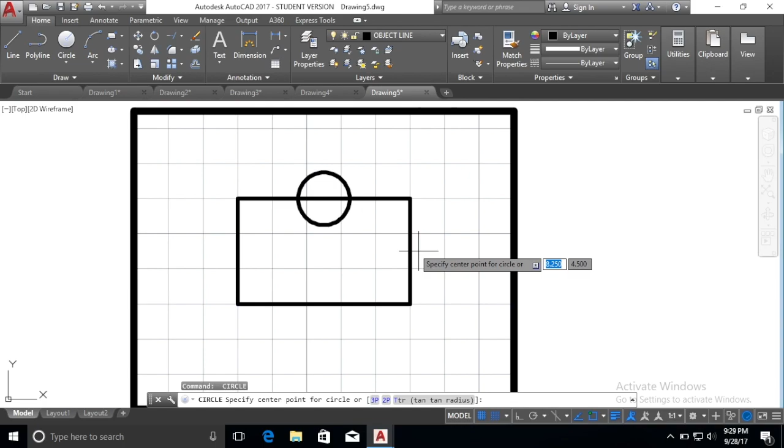I'm using the incremental snap tool to make sure I get it exactly right. Now I'm turning on Object Snap for midpoint so that the center of our circles snap to the midpoint of each side of the rectangle. I'm going to draw my circles so that they are all about the same size, and because I'm using incremental snap, they should be exactly the same size on all 4 edges.

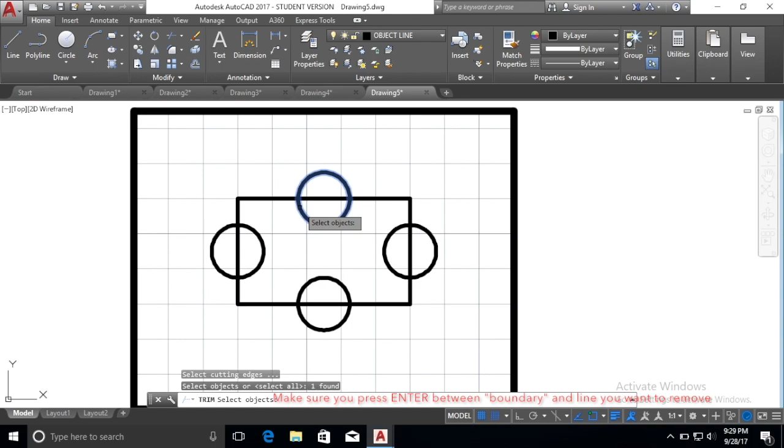Then I'm going to use a new tool, the Trim tool, to trim out the parts I don't want. First, I'm going to select the circle, then I can select which is the line that I actually want to get rid of, the boundary of that line that I want to disappear.

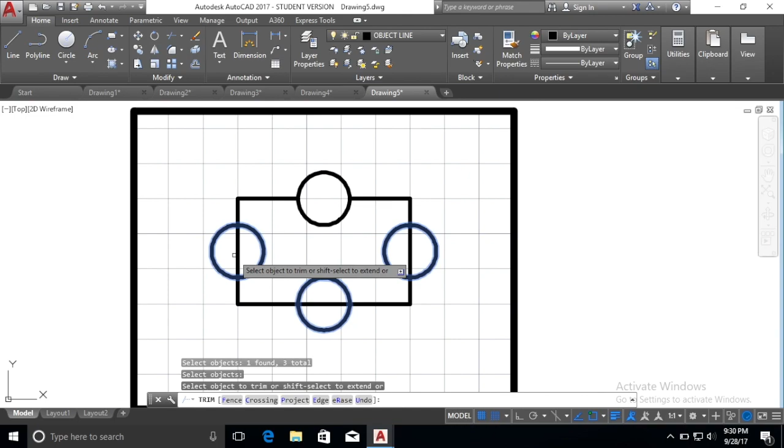You can make this process a little faster by doing all the rest of the circles together. I'm selecting all 3 of these circles, pressing enter, and then selecting the lines inside them to make them disappear. I still need to get rid of the second half of the circles on the outside. So the boundary I need here is the box. I basically don't want my circles to go outside that box. So I'm selecting all edges of my rectangle, pressing enter, and then I can trim away the outside of the circles so that I have this ticket shape.

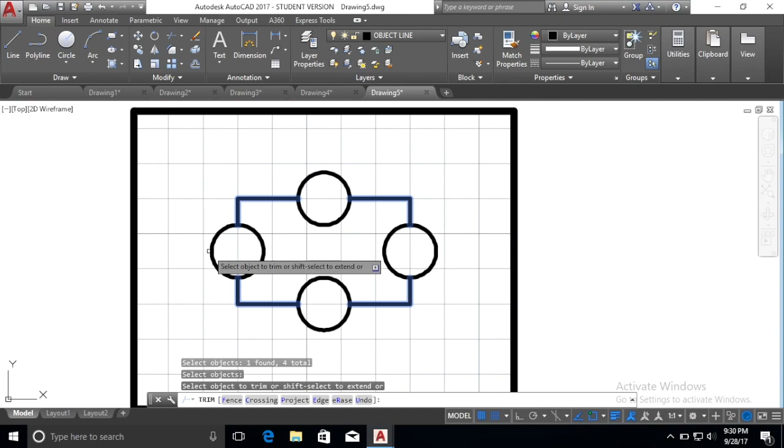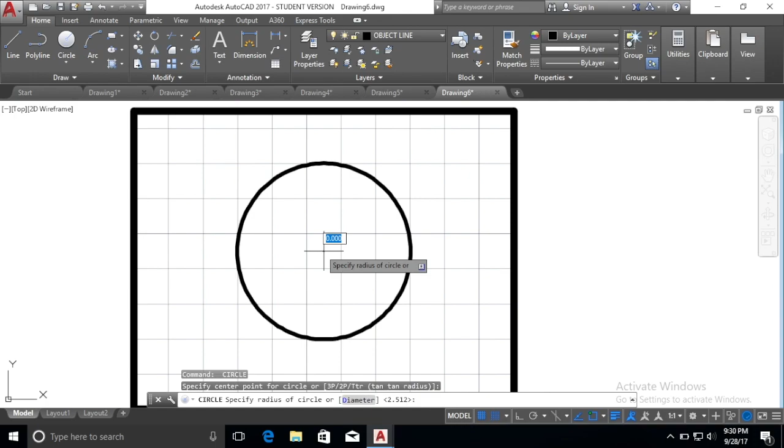Opening up the inch helper template, and I'm going to draw with my incremental snap tool 2 circles that make sure we have the exact same center. If you don't have the center object snap on, you probably want to make sure you have that on so that they are actually centered.

Then I'm going to use the line tool to draw some lines that go through the center of the circle. In between each line tool, what I'm pressing is the space bar to reset and go to another line so that I don't have to keep pressing the line tool each time.

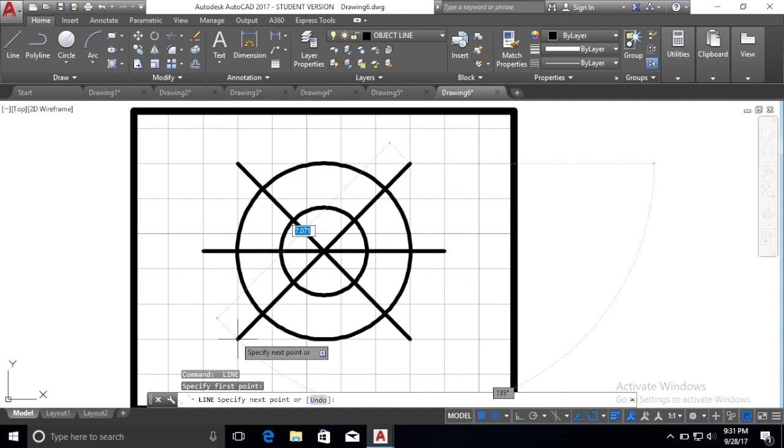After drawing all of these lines through the circle, I'm then going to use that new tool that we just learned about, the trim tool, to trim out the lines that I don't want.

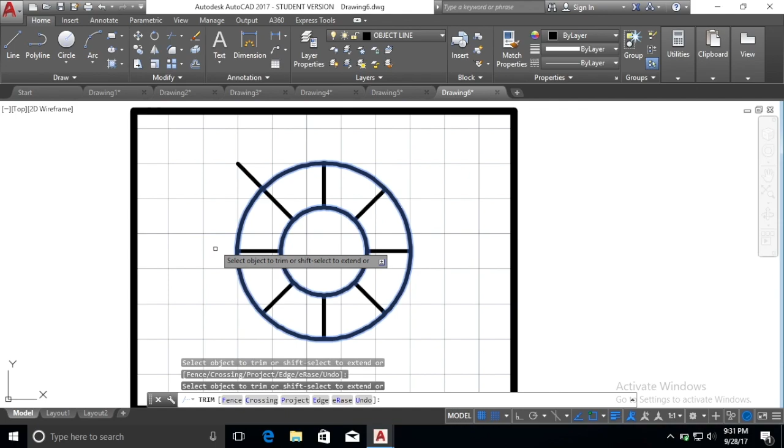First, I need to select the boundaries, so both the inside and outside circle. Press enter, and then I can select all the inside pieces and the outside pieces to get rid of the lines that I don't want. So make sure that you select the boundaries first, press enter, and then you can start to trim away the lines you don't want.

Our next exercise is using the extend command. I'm opening up a new inch helper template, and I'm going to get my line tool, and I'm going to draw 5 lines, turning on incremental snap and ortho so that they're nice and straight.

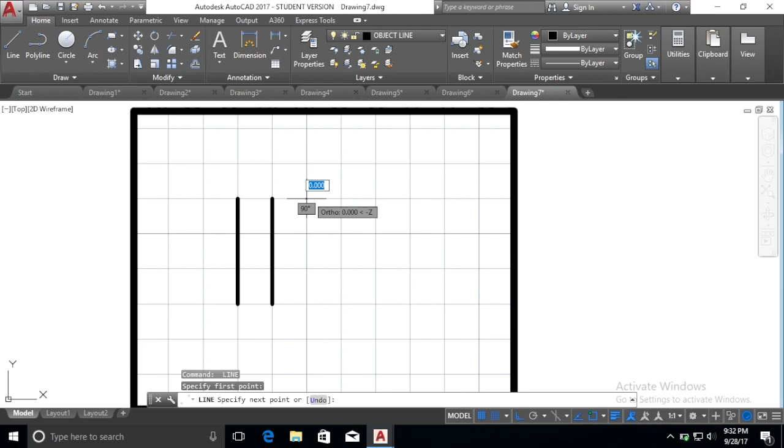Here I go, drawing 1, 2, 3, 4, and 5 lines that are all vertical next to each other. And then I'm going to draw a line across the top. Once again, I just press spacebar in between each of those to make the process a little faster.

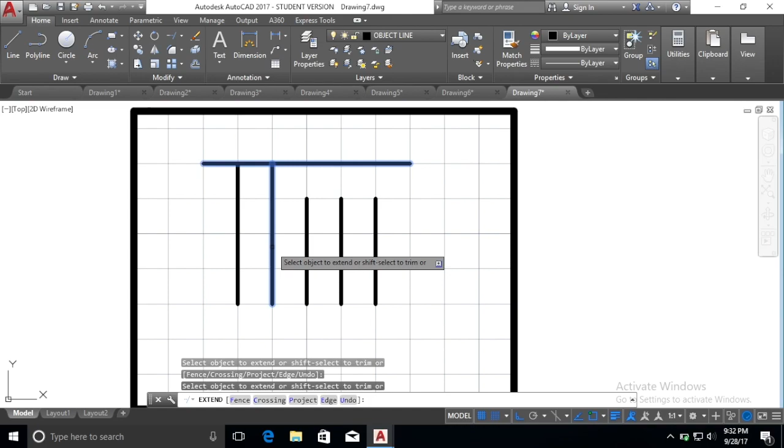Then I'm going to use my extend command to select the boundary that I want to extend to. Press enter, and then I can select each one of these lines to extend them out to that boundary that I selected first. So similar to the trim command, but kind of the opposite because we're extending instead of trimming.

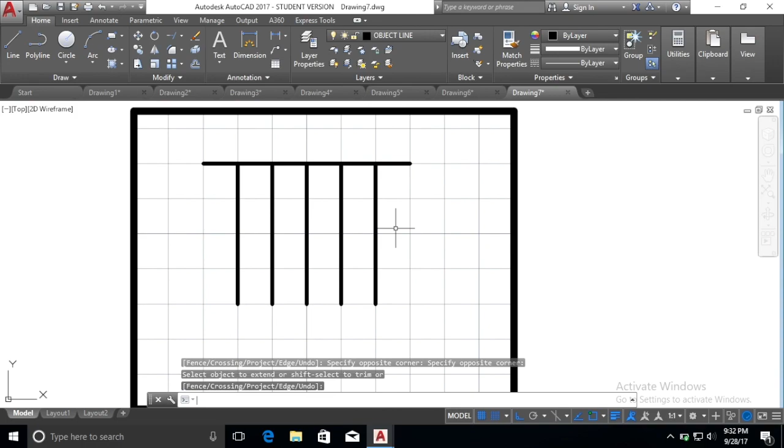I'm going to go ahead and press undo and try this one other way. You can select the boundary first, and then you can actually select all of these at the same time after pressing enter to make your life a little bit faster.

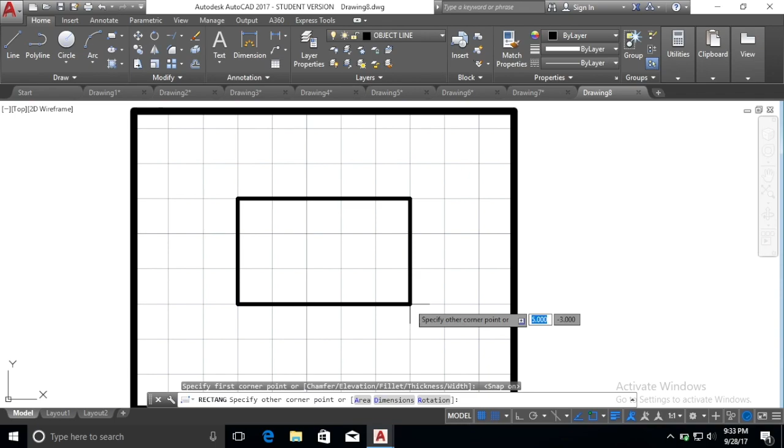Last exercise looks something like this. We're going to go ahead and open up a new inch helper template. We're going to draw 2 rectangles. One is going to be 5 inches by 3 inches, and then the other one's going to be 3 inches by 5 inches, going kind of on top of it. I have incremental snap on to make sure that I'm lining it up properly.

Then I'm going to get the line tool, and I'm going to draw some X's on the side here. Once again, pressing spacebar in between to kind of select that last command really fast so I don't have to keep pressing line tool.

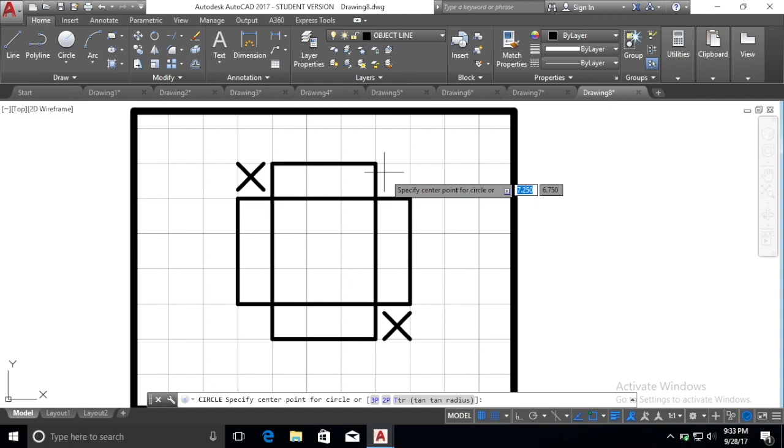And then I'm going to get my circle tool, and draw some circles in the other corners. I'm using the incremental snap so that the circle is just slightly smaller than that area of the grid. My mouse is a little sensitive here, so it's kind of hard to get it exact, but that's where I want it. And then another circle right in the middle, same size. So I'm trying to make it snap just a little bit smaller than the grid space, like there.

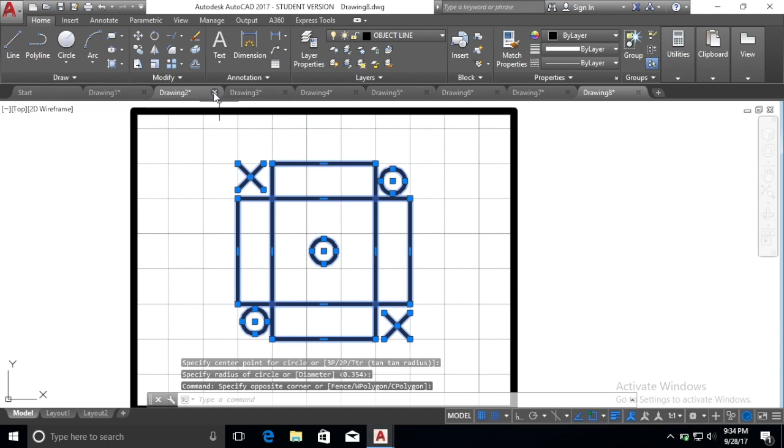Now what we're going to use is a new command called explode. So I'm going to actually select everything that we have here and click on this little icon that's explode. And what that does is it makes it so I can select individual lines from the rectangle instead of selecting the whole rectangle. These 4 lines I want to delete, so I selected them, right click and erase, or you can press delete on your keyboard, and this one's all done.

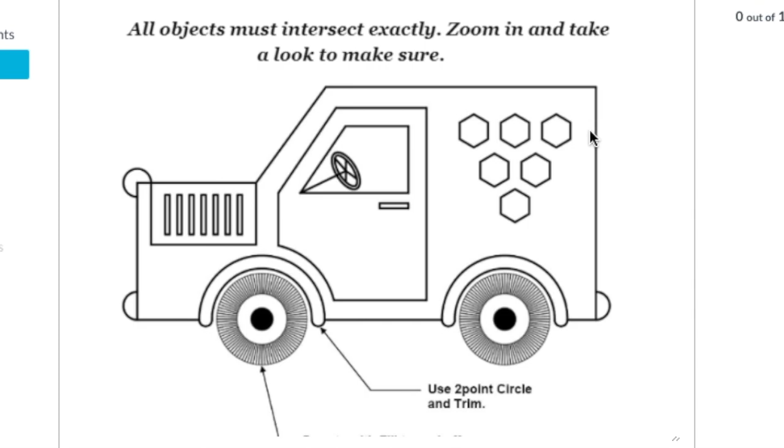Your final exercise is to draw this ice cream truck. Have a little fun with that. Make sure you're reading instructions. Use those trim commands and make sure you use the explode command as well as necessary. I hope you've enjoyed this lesson.